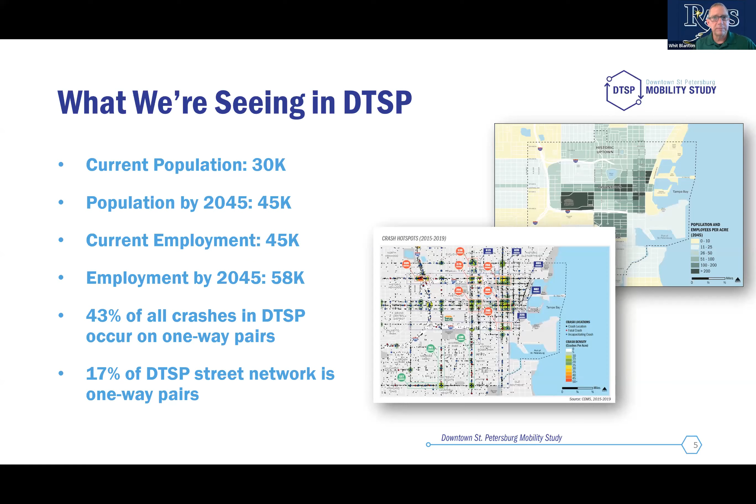Also, looking at regional travel into and out of downtown, we have to be very mindful that it is a regional activity center. And it is part of what makes Tampa Bay great, is having a strong, vibrant downtown St. Petersburg with all the destinations from the pier to Tropicana Field.

And we hope to get back to Tropicana Field on Wednesday for Game 5.

But what this chart shows you is that about 50% of the travel into downtown comes from other parts of Pinellas County to the north. About 18% comes from the south part of the county. And about a quarter of all trips you see in red there begin and end within downtown.

And a relatively small percentage of trips coming into downtown come from Pasco, Manatee, and Sarasota, and a little higher percentage from Hillsborough. We know about 40,000 people commute across the Howard Frankland Bridge every day, either going to or from Pinellas County. So that gives you an idea of the type of magnitude we're looking at.

38% of regional trips enter or leave by 275, and they either use 375, 175, or the Fifth Avenue North ramps. And about 50% of the workers in downtown live less than 10 miles away. So people do try to live close to their jobs whenever they can afford it. And a lot of commuters come from homes to the north, northwest, and west. And then about 49% of residents in downtown work less than 10 miles away. So again, people try to be as close as they can whenever possible.

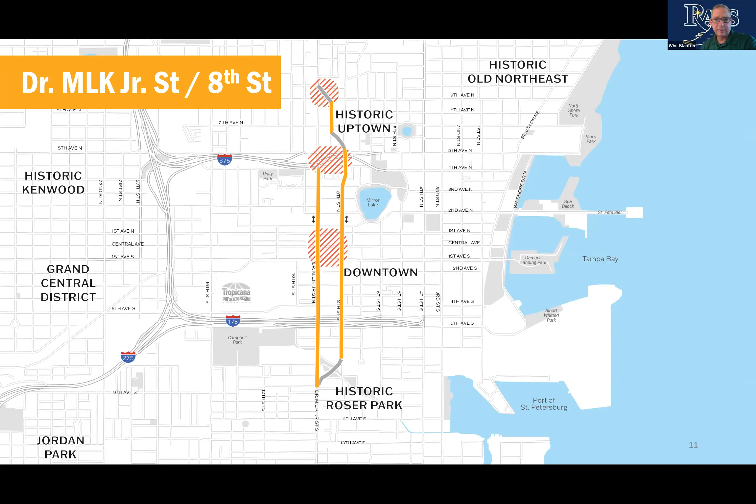And this is a map showing the extents of the potential conversion, linking historic Uptown neighborhood on the north and the historic Roser Park neighborhood to the south, connecting between 175 and 375. So one thing that we have begun to identify is we have crash hotspots throughout downtown, and this would provide for improved safety at 3 of those crash hotspots that are highlighted here on the map.

The worst case scenario that we've looked at is about 35 seconds of additional delay. And that's factoring in all the growth that's anticipated for downtown through the year 2045. And seconds of delay is something that you have to evaluate. Is it worth it? Is it worth increasing any delay on our road network to get safer roads and to get more economic opportunity and more connectivity?

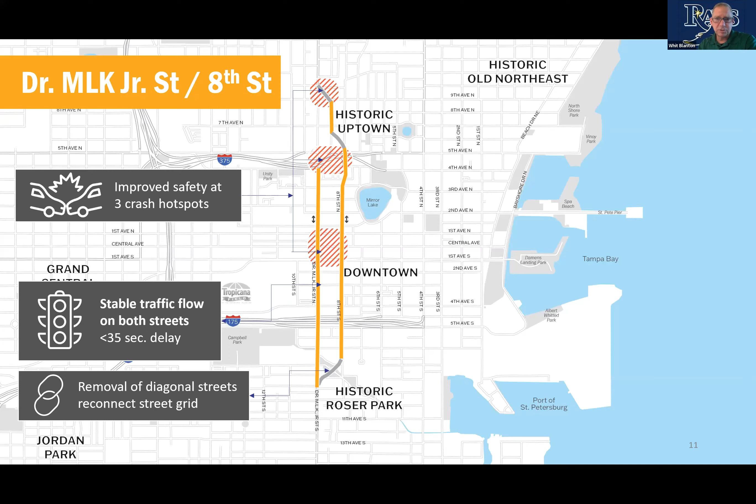We are removing some of the diagonal streets that reconnect, so those diagonals have created some safety challenges and access challenges. So that would be part of the package of improvements. And then again, we found that overall the streets will generally not be congested. And that's in the peak hour as well as throughout the rest of the day, so both AM and PM peak hour. There is some northbound congestion in the afternoon north of 5th Avenue North.

But in a healthy functioning city, you often find congestion, and congestion-free downtowns are often dead zones of activity. So keep that in mind, I guess.

And there is a slight travel time increase, again, less than a minute southbound on trips on ML King, and then about 1 to 2 minutes northbound on trips on 8th Street, getting through downtown in the worst of the worst PM peak hour in the year 2045. So again, if you flip the switch a year from now and convert these streets, this level of congestion would not be there. This is really in the way outer years.

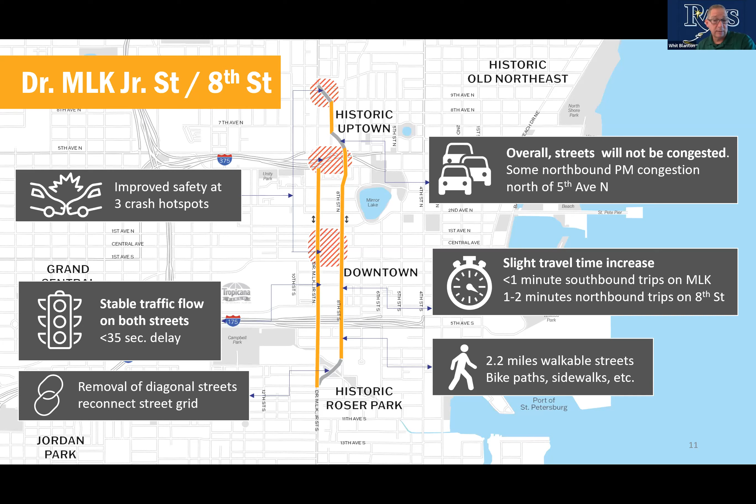And then what we would create is about 2.2 miles of more walkable streets with bike facilities, sidewalks, and other amenities for pedestrian and bicycle activity. And this would connect the bike lanes that are on ML King to the north that go all the way up to about 30th Avenue North. And then it would also connect to other facilities to the south. So you'd begin building more of a connected bicycle network that would also tie in with the Central Avenue and First Avenue bike lanes that exist, and tie in with the Sunrunner bus rapid transit project.

So just to summarize, this project is improved safety at 3 crash hotspots, additional miles of safe walkable streets, a reconnected street grid that gives more economic opportunity and expands what's happening on Central Avenue to other parts of downtown. Less than a minute of travel time on ML King, a 1 to 2 minute travel time increase northbound, and it does not impact the overall network. And this is regardless of what we do with 175 and 375. So even if you take those interstate spurs out, the conclusions are the same. And I think that's an important takeaway.

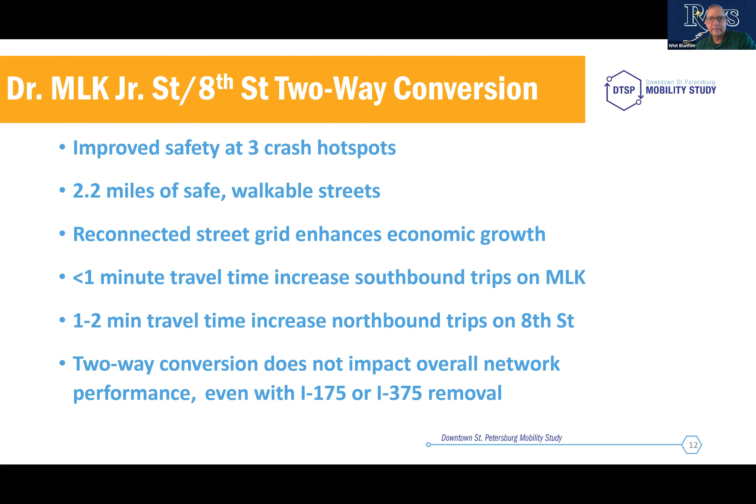So we provide higher quality on-street bicycle facilities that's enabled by this conversion, better non-motorized transportation options throughout downtown, increased neighborhood connectivity, more business visibility and access, a design concept and traffic study for Booker Creek Bridge and the connection of the grid streets. And we would optimize the signal timing to help facilitate traffic flow, but at a more steady, slower rate of speed.

So now we want to hear from you about what you think about this particular project. Are you strongly supportive or somewhat? Do you need more information and you're unsure? Or are you vehemently opposed by being strongly unsupportive of this? So go ahead and take a few minutes to respond. Okay, so a lot of you still feel like you're unsure and you need more information. And then there's a smaller group that is strongly supportive. All right, let's move on.

And by the way, we're having these workshops throughout the month of October, so we'll have a lot more opportunities for people to weigh in. So now we're asking you why you voted the way you did. And even if you are unsure, you can still respond. What are some concerns that you have that you would like to have answered? Do they fall into one of these categories? And if you pick other, you can type in a response.

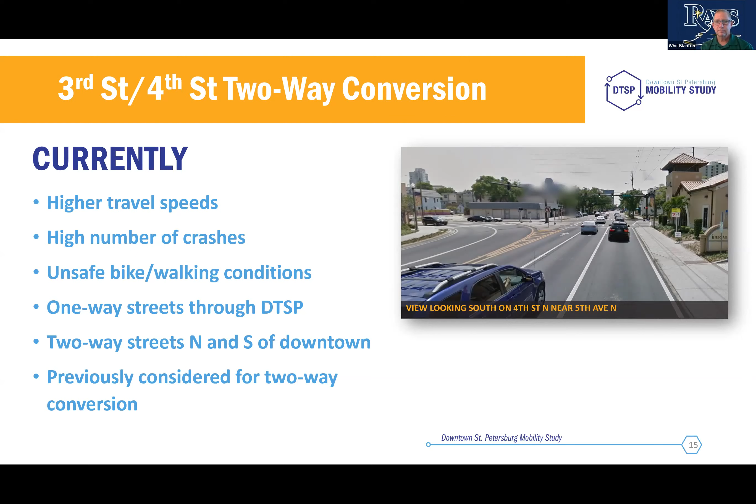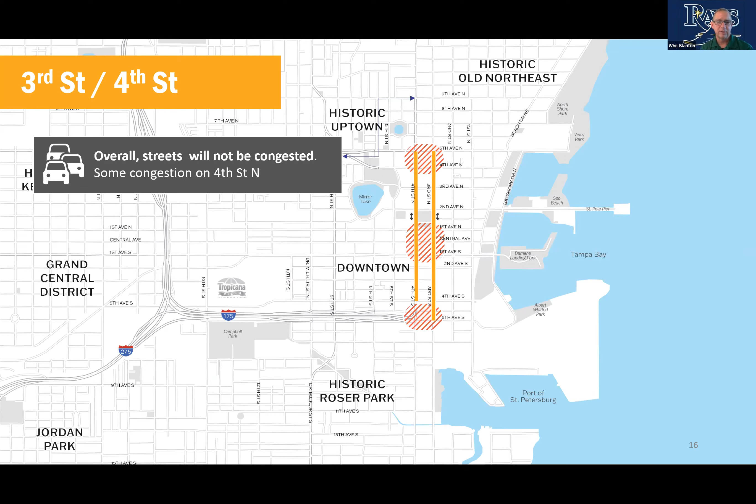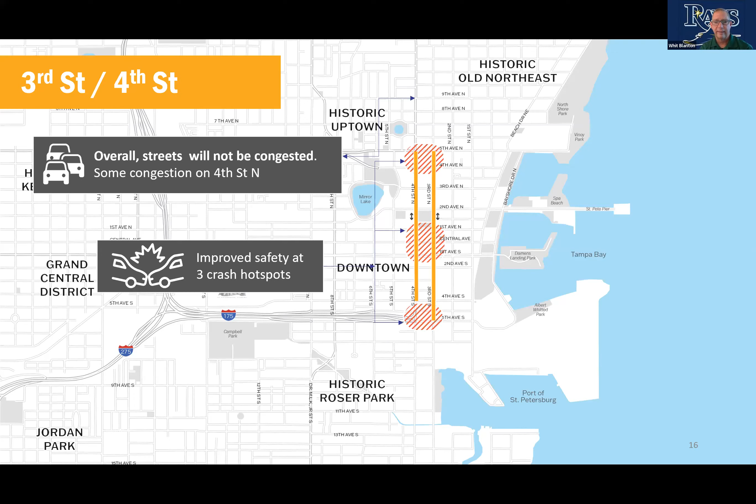And these are the extents of the 3rd and 4th Street conversion. Again, 5th Avenue North and 5th Avenue South. And what we see on this map, again, that our testing using our model and tools are that overall with this, you will have some congestion on 4th Street, but generally there will be not an increase in traffic congestion. This would be a very moderate level of congestion. We have 3 crash hotspots that are identified here between 4th and 5th Avenue North at Central and then down on 5th Avenue South. And we believe that the conversion would help improve safety at these locations for all users.

Less than a minute in travel time increase southbound on 4th Street. And again, that's 2045 with 15,000 more people and jobs living in downtown. And this would create about 1.6 miles of more walkable streets with bike paths and sidewalks and all the amenities that go with that. And generally stable traffic flow on both streets, less than 35 seconds of delay due to congestion. And again, that wouldn't be tomorrow or next year, that would be 20 to 25 years from now under this scenario.

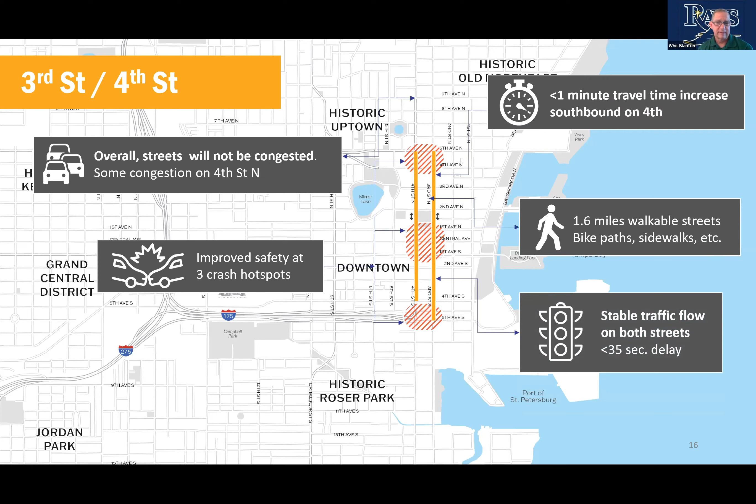So this improves traffic safety at 3 hotspots, again, about 1.5 miles of more walkable streets, less than a minute of travel time increase southbound on 4th Street getting into downtown. And again, don't see much northbound, stable traffic flow on both streets, and it does not affect or is not tied in any real way to what we consider for 175 or 375. Those are independent of the one-way to two-way conversion. And I think that's probably because we are looking at different travel markets for the one-way streets versus the interstate spurs, different distance of trips and different types of users.

And what this enables by looking at 3rd and 4th Street, the opportunity for higher quality, better designed on-street bicycle facilities, fully conforming to current standards, more viable non-motorized transportation, better transit service, better walkability, increased neighborhood connections, increased business visibility and access, safer crossings at key junctions. Maybe mid-block crossings would be considered as well, although the blocks are pretty small, you might not need to do that. And then the opportunity to look at a design concept for reconnecting the street grid here.

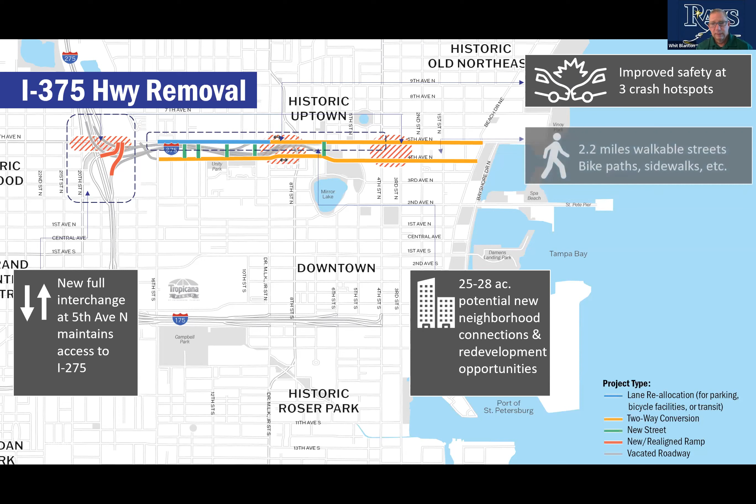And what we found is that you would have improved traffic safety at 3 crash hotspots, at 3rd and 4th, 8th and 9th essentially. You would have 2.2 miles of walkable streets, bike paths and sidewalk. Now you would have some building congestion, and this is a bit of a concern that we see, particularly on 5th Avenue North. So it's really difficult to replace the capacity that 375 provides with 5th Avenue North, because the right-of-way is pretty limited in that area, and especially if you're talking about a two-way street conversion.

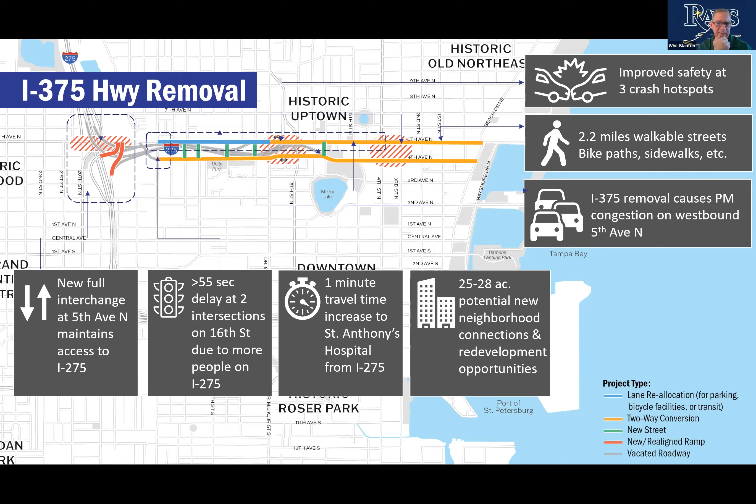And so you would have about 1 minute of travel time increase to St. Anthony's Hospital from I-275. So that relatively short distance, because of the traffic and buildup, you'd have about another minute getting into that hospital district. And a little bit more than 55 seconds, so about a minute delay at 2 intersections at 16th, due to more people on I-275. So the traffic does not disperse as well, and people trying to get to I-275 would have to navigate through 16th Street and 5th, and that does become a bit of a concern where you see that hatching area in particular.

So 375, whether it's a partial or full removal, does give us a bit more safety. It does provide more walkable access. It gives almost 30 acres of land that could be used for neighborhood, park, redevelopment, new buildings, for jobs, all those kind of things. But there is some congestion that builds here. And again, this is independent of the one-way street to two-way street idea, except as it's packaged with 175, with 375 being removed.

And what does this enable? Well, the first thing is we wouldn't do this overnight. This is a heavy lift that would require a lot of support by regional and federal and state partners. So you would have to go through that project development environmental study that I mentioned earlier in the presentation. You would have to look at interchange concepts with I-275. You would have to look at road reconfiguration concepts. You would have to go into a design that considers the environmental, park, and historic and cultural resource impacts, neighborhood impacts. And then you would develop design options, including a no build, including various build alternatives.

And those would all look at different ways of reconnecting the street grid and what those 30 acres could be for. You do have a lot of redevelopment potential. And as people on this call know, there's a lot of growth and opportunity and need for affordable housing and things like that that could be looked at here. But again, we're not saying any of those things would happen. That would be a decision point down the road.

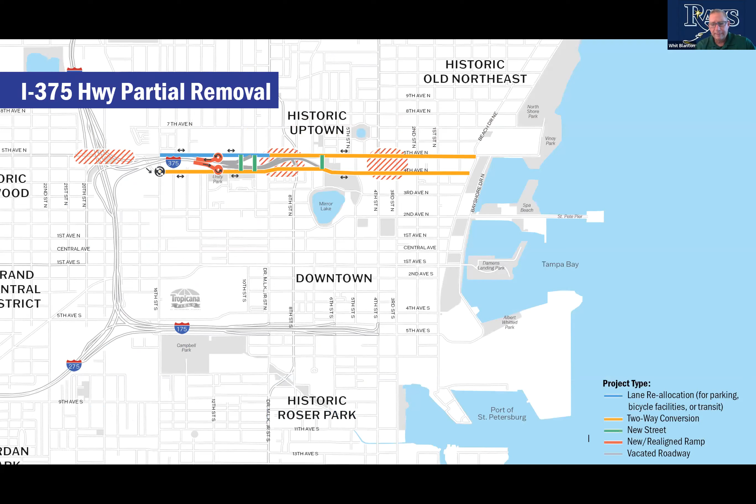So this is partial removal of 375. And this is a smaller footprint on this project, but it has similar reactions to full removal. And so under partial removal, what happens here on this map, again, different ways of dealing with the problem of improved safety and access. A little bit less, but still about 2 miles of walkable streets and bike paths. But even partial removal would lead to some congestion on 5th Avenue North and 4th Avenue North.

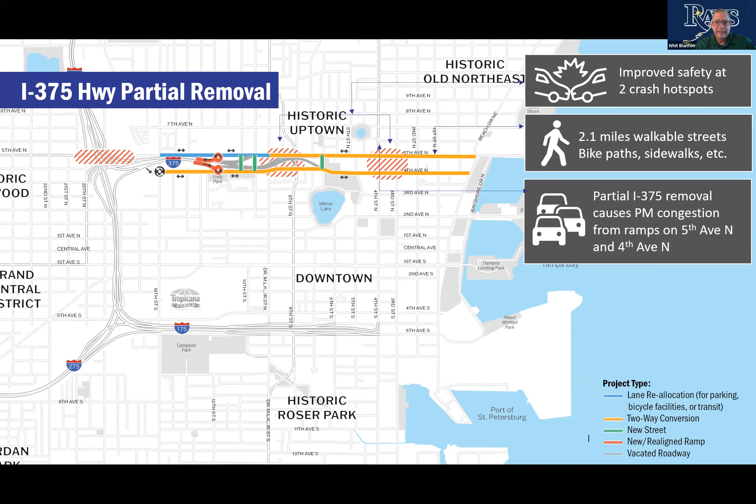And you can see we've tried to get fairly creative here with how you access I-275, and those are roundabouts that are shown just west of 10th Street and before you get to 13th Street to facilitate the connections to and from the ramps with the one-way street conversion to two-way. So you have about 1 minute travel time increase to St. Anthony's. And I-375 begins and ends at these roundabouts on 4th and 5th Avenue North.

So that could introduce a little bit of an unusual factor, but it's quite common in other parts of the country to have roundabouts at the beginning and end of interstate on and off ramps. Carmel, Indiana comes to mind, and Denver, Colorado has done that as well. No changes to I-275 and no changes at the interchange at 5th Avenue North. So this would be a cheaper project than the previous one where you fully remove I-375.

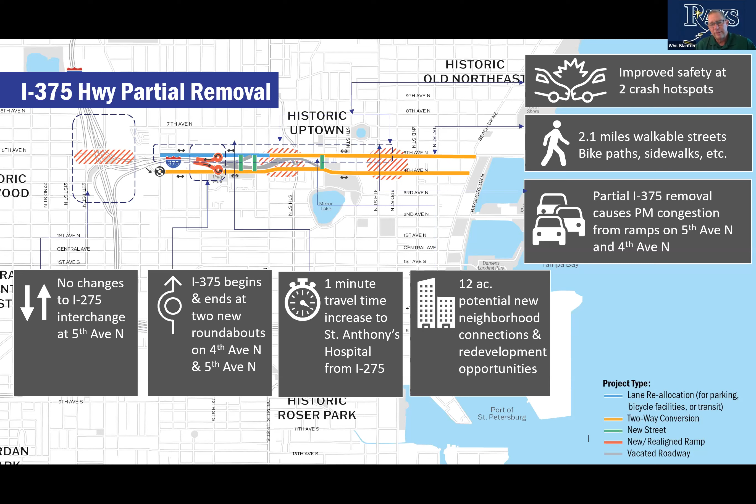And so the summary here is, again, no impact to I-275, improved safety at 2 crash hotspots, and you can see a little bit less, about half the amount of potential neighborhood redevelopment opportunity because of keeping the footprint intact of much of 375 and some of the reconfiguration of the roadway. But we do have the same congestion problem. So the partial removal doesn't really do anything better than the full removal from a traffic congestion level.

And so the project opportunities, again, we would have to get into the more detailed project development environmental study, but you would have this ramp access modification with roundabouts to transition traffic from a higher speed to a lower speed facility, and all the turns that they might want to make to get to places. And then you would have some improvement in multimodal transportation, but not as much. Increased business access, some redevelopment, a dedicated bikeway would still be able to happen, and optimize signal timing.

So what do you think about this one? A little bit less of an economic opportunity and less footprint, but about a similar traffic impact. Okay, so a little less support on this one. And then maybe tell us why. So again, the same potential responses.

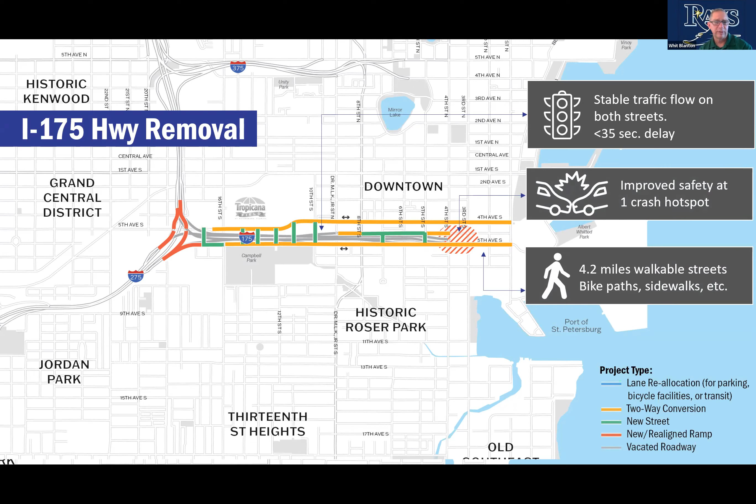1 to 3 minutes of travel time to the hospitals from I-275. So that's not insignificant. But again, if you listen to the ambulance service, they're much more concerned about stable and steady as opposed to fast and rapid connection. But this is something to think about. The streets generally will not be congested because we have a lot more opportunity to move traffic on the 4th and 5th Avenues because there's right of way and there's ability to create more of a true boulevard effect here.

8 new street connections help disperse the traffic. So one thing that we find is that the traffic is not overly burdening one road in particular. It's able to be accommodated by 4th and 5th Avenues, and then it filters through and disperses through the street network pretty equitably, and that's good news. This creates about 25 new acres of development opportunity where it's probably sorely needed to support the neighborhoods to the south. A new full interchange at 5th Avenue South would maintain the access to I-275, so you're not giving anybody any disproportionate access to regional destinations.

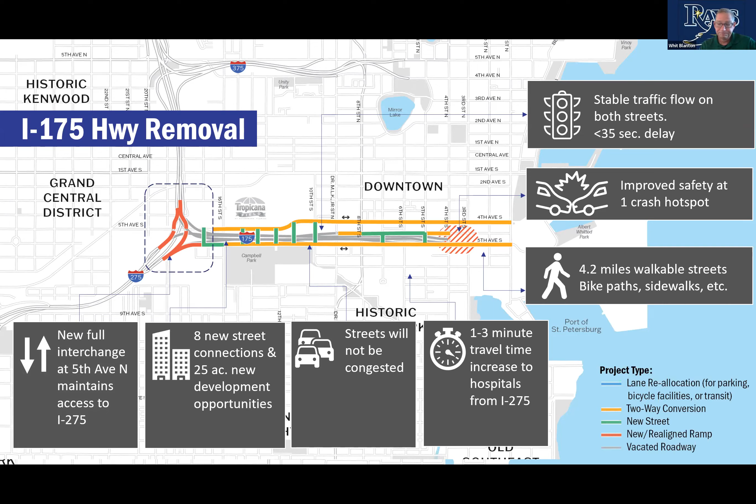So to recap here, full interchange at I-275 and 4th and 5th Avenue two-way street conversion. So there won't be this crazy one-way merge, weave, dodge to get in and out of USF St. Pete and the Innovation District. Full interchange maintains regional access. We address one of our big crash hotspot locations by the USF St. Pete area. A lot of miles of safe walkable streets, 25 acres of redevelopment. But again, what's the trade-off here? A little bit more traffic congestion, a little bit more delay, but generally speaking, the traffic handles this pretty well. And again, this is 2045 worst case conditions and very stable traffic flow.

So what this enables is better transit service, reconnecting the street grid to the Trop, more visibility for the redevelopment that happens at the Trop under whatever condition, with or without the Rays there, enabling 4th Avenue South and 5th Avenue South to become true boulevard streets that are inviting and appealing and more of a gateway into the downtown and into the neighborhoods. Significant redevelopment opportunities and enhancing business and economic growth, and the opportunity for fully protected bike lanes, which we don't have too many of in our region, and then optimizing the signal timing.

So what do you hear? What do you think about this? Let us know. Okay, and let's see how people have voted. All right, so we get a little bit more strong support, and then we also have a strongly unsupportive. Fair enough, and tell us why.

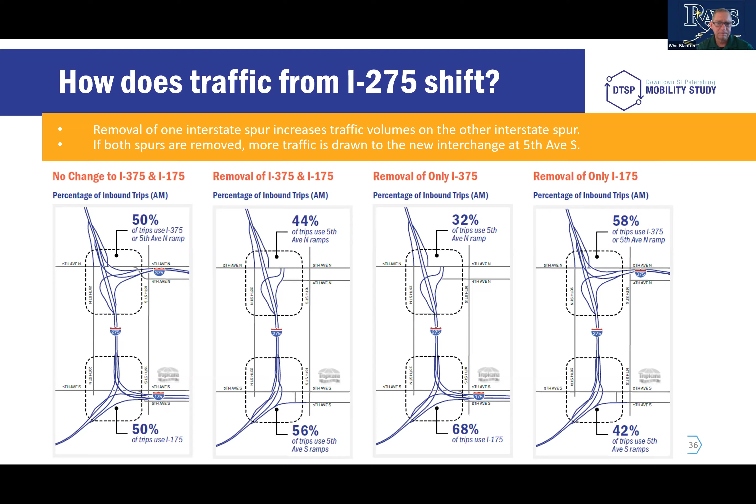So next steps, where are we going from here? We're going to listen to your feedback throughout the month of October. This is the first virtual workshop we're doing. And then we have an open house workshop coming up in about a week or so, and 3 more of these virtual meetings. So we're going to listen to the feedback we're getting.

We're also dropping in and meeting with a lot of different groups over the next several weeks. And they won't get the full presentation like this, but we'll be pointing them to the virtual workshops to participate. And then the open house that I mentioned, where you can drop in, you can just talk to us and look at boards, and we can have more of a dialogue.

So after all that happens, in October and November, we're going to create an action plan. And that action plan will include some recommendations for specific projects. It'll also include some recommendations against specific projects, or at least not at this time. And then it'll create a stepwise approach to how we start doing those things, whether we need a PD&E study or an engineering study, or what level of approvals we need.

We do plan to go to the city council coming up in the near future and brief them. And then we will brief the Forward Pinellas board as well. And then ultimately we will seek a recommendation from the city council for action and a recommendation from the Forward Pinellas board for action. Now, there'll be some different levels of action.